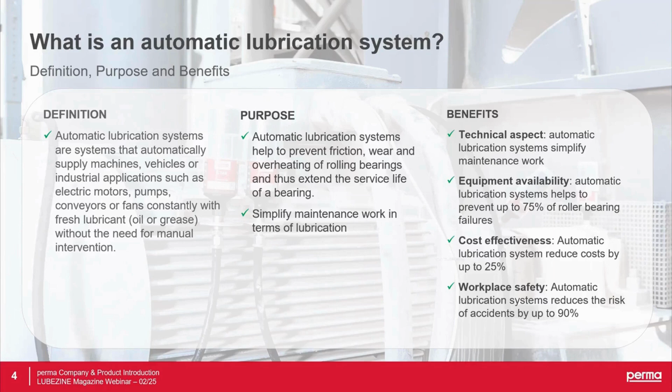And also, by using the correct way to install the lubrication system, it could reduce the risk of accidents for the maintenance worker up to 90%, by removing a dangerous lubrication point out of a dangerous area to a more safe area, which is easier to access for the maintenance worker.

So now we know what is automatic lubrication, but there are different types of automatic lubrication systems. First we have the single point lubrication systems - that means one automatic lubrication system for each lubrication point. The benefit of a single point lubrication system is they are individually adjustable to the requirement of each lubrication point, meaning different greases, different dispensing time, different amount of grease, which can be directly served to the lubrication point.

Then we have the multi-point lubrication systems. Multi-point lubrication systems are also automatic lubrication systems that supply several lubrication points at the same time with a specific grease or oil. They are often used on systems where several bearings or other moving parts need to be lubricated with the same lubricant.

And then last but not least, we have the centralized lubrication systems. These are also kind of multi-point - you can serve different lubrication points at one time. The big benefit of a centralized lubrication system is that you can serve the lubrication points over a big distance with longer hose lines. The big disadvantage of these systems is that centralized lubrication systems are most of the time very costly and maintenance intensive, so they are not easy to operate or install.

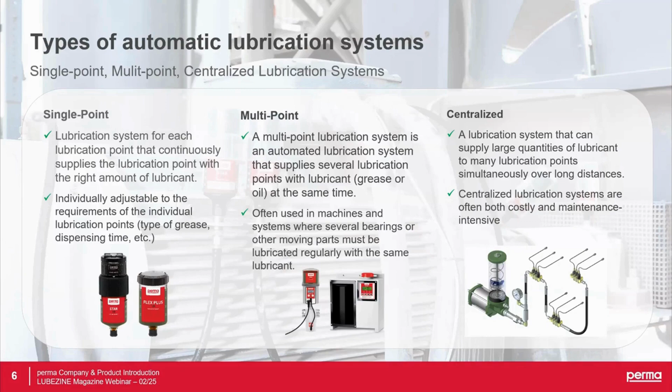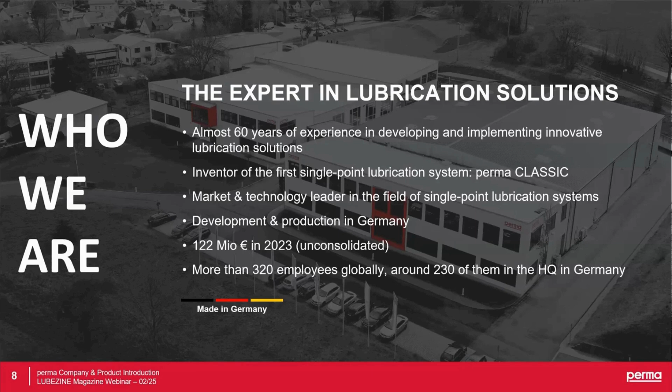Yes, so that brings us to Perma. Who we are: at Perma-tec, we are the world's market leader in terms of single point lubrication systems, both in market and technology. All our products are produced and developed in Germany, so they have the made in Germany seal on them. Last year, in 2023, we made around 122 million euros turnover only with lubrication systems. We are a global operating company, with a headquarters here in Germany and 230 people working here. We also have subsidiaries in the US, India, Australia, France, Italy, and Spain. In total, we have around 320 employees globally.

So why work with us, or why work with Perma? As I mentioned, our products are globally available. We have our subsidiaries, but we also have a network of competent partners who are constantly trained, in more than 120 countries worldwide. We have a lot of experience in single point lubrication systems because we are really focused on automatic lubrication systems. That means we have a lot of experience in different markets, for different applications, in different industries. We have huge know-how, and we've already sold more than 55 million of our lubrication systems. In terms of lubricants, we are also very well experienced. Every year we fill more than 500 different lubricants into our systems, whether greases or oils, for an overall consumption of around 600 tons every year.

In total, we have a lot of flexibility in terms of lubricants - we are not tied to a specific lubricant. Greases up to NLGI class 2 can be filled into our systems, as well as oils. We permanently have around 150 lubricants in stock, and in our overall database we have around 1,500 lubricants that have been filled into our systems so far.

Okay, thank you. Like Ben explained, we have several systems in our stock, in our portfolio. Let's start with the electrochemical single point lubrication systems. Like Ben said, we also have multi-point systems. In this webinar, we will mainly talk about single point lubrication systems because this is our main business, to keep it a bit shorter, since the multi-point systems are a bit more difficult to explain.

The first group is the electrochemical systems. Inside every system there's a chemical reaction that produces gas inside the system, and the gas pushes the piston to the front, to the outlet of the system. With this gas pressure, we push the grease out of the system to the lubrication point. Depending on the setting, we produce it a little faster or a little slower, depending on the amount of grease you need for your bearing or application.

Every system has its own application, its own area where we can use it. We have systems for outside use, which are better for environmental conditions like rain or dust. We also have systems for EX areas, and so on. Depending on what you need for your application, we can find the right solution, the right product.

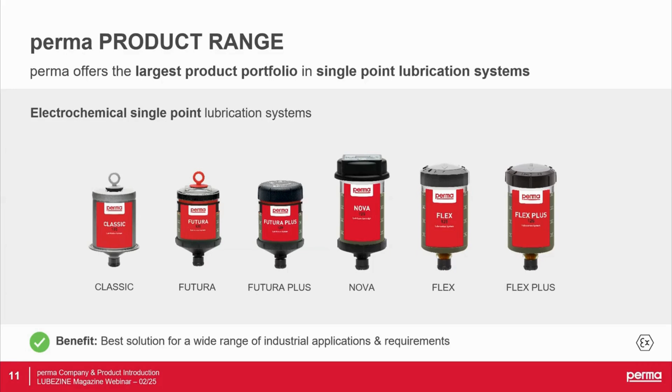So on the next foil, you can see we have the electromechanical systems. We constantly develop our systems. Perma Classic was the first one, invented let's say 60 years ago. Perma is not standing still; every year we try to put out some new systems to bring some improvements.

Starting with the Permastar Vario, we had an electromechanical system which has a little bit more power, a little bit more function. We have the possibility for different cartridge sizes, for a little bit higher possibilities to program the system for different times, for different settings.

Starting in the last few years with more connection systems, we have a Bluetooth version, the Permastar Vario Bluetooth, which can communicate with the smartphone, with our app. We talk later on, and so we can also get some maintenance from the distance.

We don't have to go directly to the machine, to the dangerous area where the systems are installed. This is also possible. We have also the EX version for the dangerous areas, or for gas stations or something else, which is the first one for an electromechanical system that can be used in an EX area.

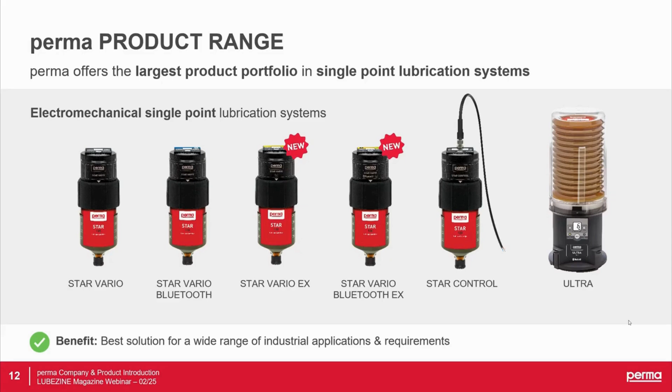Like Ben said, we are not only specialized in our systems. We also have big know-how about the applications, about the situations outside at the customer applications. Different applications, different installation points, and for this it's very important to know the best way to install the systems there. So we have two possible installation or mounting solutions.

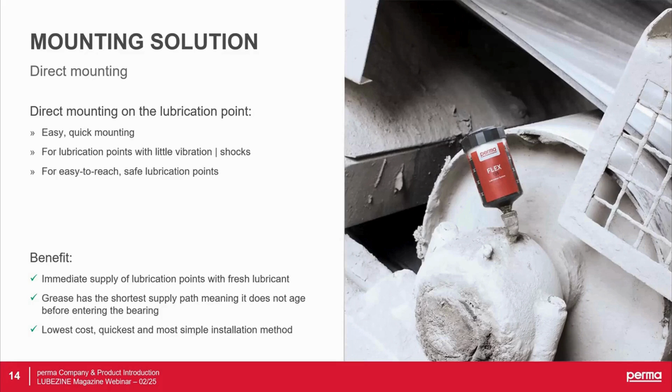It's also good because maybe it's difficult to reach the lubrication point over there. Maybe you need a ladder or something else to climb up high to the lubrication point, and to not do this too often, it's useful to use the remote mounting, which is also good to make sure for the system. If you have a little bit of vibrations or shocks, some stones can fall on the system or on the lubrication point, then it's better to bring the system a little bit beside.

To save the system, and maybe if it is an even tougher area, we have also some protection caps for the systems. Sometimes it's also the easiest way for the maintenance guy to check the system. You're searching for a good place where you can see the system, and if you want to take a look at the system, if everything is running well, or if you have to change the cartridge, it's good to have a position which is easy to reach. And if you can go there while the machine or the application is running, you don't have to shut down the machine for the lubrication or for the change process.

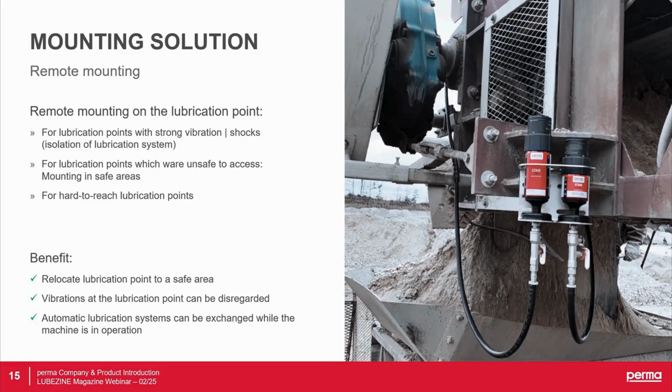Mainly here with the Permastar Vario, because for electric motors it's the best solution. Electric motors have a higher back pressure inside due to the sizes of the bearings and the sizes of the holes of the drills where the lubricant has to go through to the bearing. This is why we use mainly the Permastar Vario.

With the Permastar Vario, we have enough pressure to be sure for remote mounting, that we have enough pressure to bring the grease to the application, because a longer hose brings up a little bit of back pressure to the system on top, and the Permastar Vario can handle this up to let's say 3, 4, 5 meters depending on the grease and the temperature.

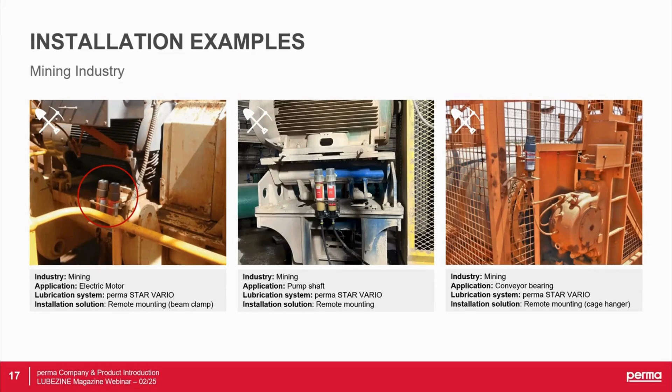Like Ben said, we're working with many different customers. We have many different industries where we have installed our system, many applications. I think for every application you have, we find the right solution with our products and our accessories.

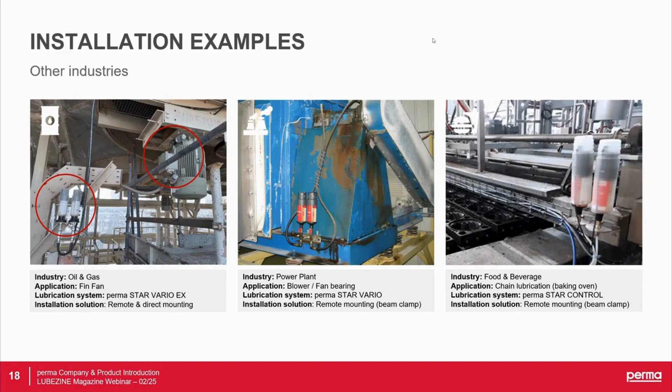Then we go to another big part of our portfolio: the Perma services. First we have our Perma Connect app, we have Easy Smart Connected. Since last year we have a fusion between our Connect app and our Select - sorry, we have deleted the Select, so now I forgot the name. So with the Connect app, you have the possibility for a survey, to get some information for installation and for maintenance and exchange.

How does this work? We have the possibility to calculate the relubrication amount. So maybe if you don't have any information from the distributor or from the maintenance documents of your machine, you can use our app to calculate the right amount. For example, if you have a bearing, you can calculate, depending on the bearing size and the environment around the bearing, the right amount of grease and how to relubricate it. In the end, you get directly the result of how to program our system to have the right dispensing time.

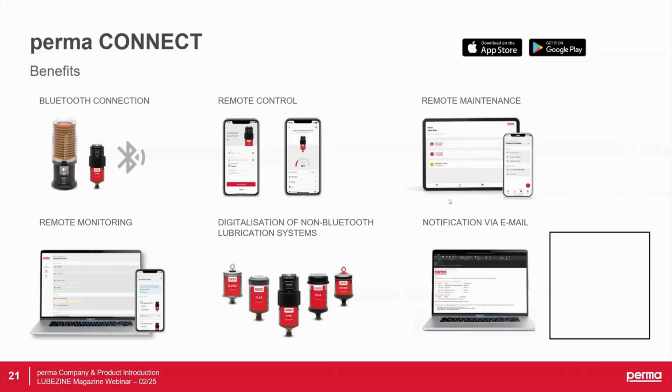We also have a Perma Academy. We try to transfer our knowledge about the greases, about our products, about the applications. So we have different possibilities. As a partner of Perma, you have the possibility to reach out when you work with us and have some questions.

For the African area, I will be your contact. If you need help to find the right grease, the right system, or the right amount, we can help you with this.

We also have the Perma Academy, the E-Academy. You only have to register on the E-Academy, and you can take training on our systems and on some main applications we have there. We also have the possibility to make a video training based on the needs of the partners or customers, and if necessary, we also have trainings here in Euerdorf.

You have the possibility to come to us. We have a big teaching room, an academy room with different applications and installation situations, and we can give you a little bit more know-how for the complete relubrication part.